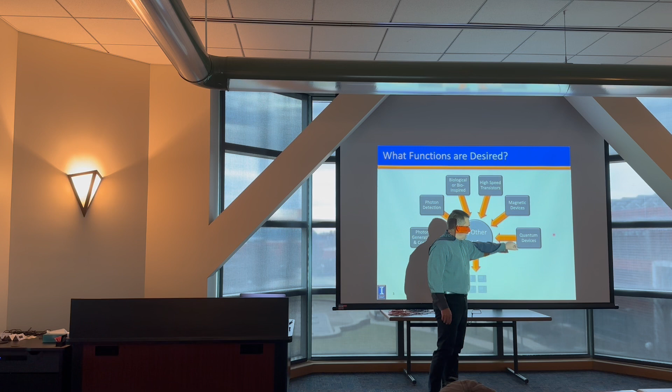Okay? So we'd like to be able to take the sorts of large-scale integrated devices you can make on silicon, and add other things to those. We'd like, for example, to be able to do photon generation and control. We want to be able to detect photons, so we can basically augment silicon by adding photonic functionality. People are talking about quantum devices - can we enhance silicon by bringing various devices that are being used in quantum information, quantum communications onto that platform as well.

If we start talking about things like AI systems and other sorts of things, are there other kinds of devices - for example, magnetic devices or other sorts of non-silicon devices that can be used for those sorts of things. Of course, beyond just conventional electronics, there's an interest in pushing the speed higher. So does it make sense to augment silicon with materials that can run at higher speed?

So you basically have CMOS processors, and maybe at the edge of those devices you have things like high-speed electrical multiplexers and demultiplexers implemented in other materials that enable you to push a bit faster, turn up to 11. And then bio-inspired materials - people are looking at biological systems. Is there something in the future that involves augmenting silicon by having something of a biological nature?

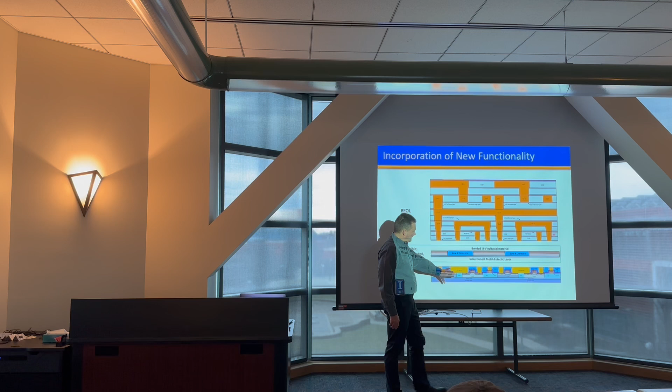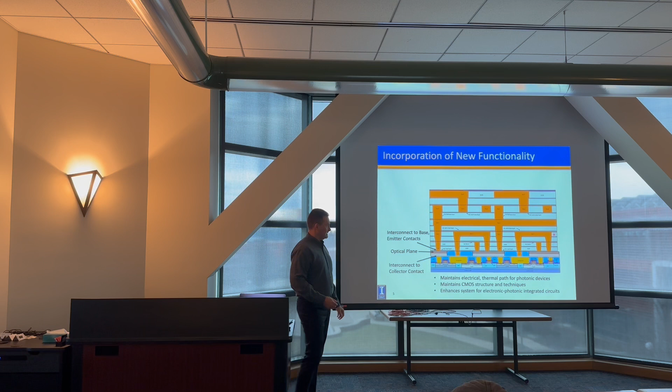When we think about incorporating functionality of some kind, what would be ideal is if that were an actual layer in the CMOS stack. So we start by taking our wafer coming out of the front end of line process. We incorporate one or multiple layers that have some additional functionality, 3-5 materials, etc. Then we build the rest of the stack on top of that, putting in all our interconnect layers, so that this becomes an augmented integrated circuit with enhanced functionality embedded in it. This is where we'd like to be able to go eventually.

Stepping back again, from a silicon perspective, what does it do well? What does it do poorly? From the standpoint of things it does right, you can't argue with the manufacturing infrastructure. It costs $20 billion to build a fab. There's fabs all over the world. You're not going to replace that infrastructure with something else, and it's a well-oiled machine, so to speak.

Silicon is robust. If you work with silicon versus 3-5 materials - how many of you handle 3-5s regularly? Probably a handful of you. If I have a silicon wafer, holding it with tweezers, and I drop it from here, it's probably going to bounce. Maybe it'll break, but it'll probably bounce. If I do the same thing with gallium arsenide, it's going to break. If I do the same thing with indium phosphide, it's going to break even worse. The fragility of compound semiconductors is difficult to deal with when you talk about scaling up your processes.

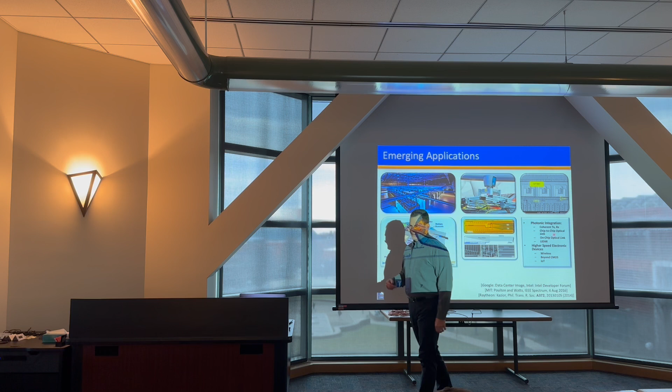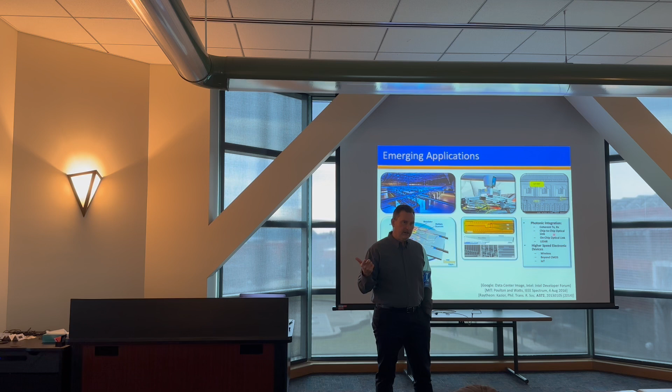For automotive applications, people have been talking about LiDAR for self-driving cars, and general automotive applications too. A number of people have also been looking at ways of augmenting the speed of silicon by having CMOS combined with something like a high-speed indium phosphide HBT integrated with that, to allow you to do things beyond the conventional limits of silicon—like 5G, 6G. So there are a lot of these emerging applications, largely driven either by the desire to do things of a photonic nature, or to have speed you can't get with silicon devices alone.

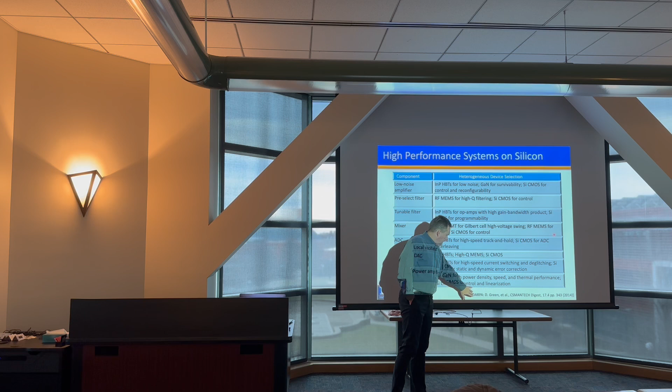A handful of years back, DARPA had a program trying to really push heterogeneous integration forward. It started as DAHI and had a variety of names. Dan Green was the guy at DARPA pushing that at the time, and he was basically saying: here's a number of things we might be able to do if we had the capability of putting other sorts of materials onto silicon.

He was focused mostly on electronic applications—saying if I want to do a low noise amplifier, ideally I'd like either indium phosphide HBTs or gallium nitride, but I'd like to do all of my control and reconfigurability in silicon CMOS. Or for filtering, it'd be great to have RF MEMS with silicon CMOS, or tunable filters using indium phosphide HBTs with silicon CMOS. So the theme is adding a unique functionality that the III-Vs do well, augmented with the power of CMOS for programmability and control.

So that's electronic. From a photonic perspective, there's tremendous interest in increasing the data rate, both for long haul links and within data centers. What's the limit? It's interesting—I remember people arguing maybe a couple decades ago, why do I need 10 gigabits over my fiber? With 10 gigabits per second you can pass the entire Library of Congress in whatever amount of time, and those arguments were taking place.

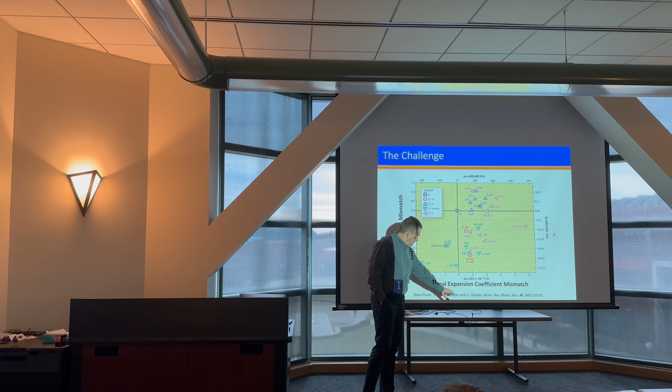Quite often what you'll see is something that shows lattice constant versus band gap. Well, that's important if I'm designing a device, right? If I want to make a heterostructure device, I need to stay with the same lattice constant, and I want to build up a structure.

But this more importantly shows what I can realize without messing my material up. And the two most important things are: how much deviation does my lattice constant have from the material I'm trying to put it on, and secondly, what is the thermal expansion difference?

If I have two materials that are perfectly lattice matched, but they have a huge difference in thermal expansion coefficient, I'm going to have a reliability problem. So this encapsulates both thermal expansion mismatch problems as well as lattice mismatch problems.

And if I look at silicon sitting here by itself, that really shows you what the problem is. The problem with putting materials on silicon is that its lattice constant and thermal expansion coefficient are both really not well suited to other materials.

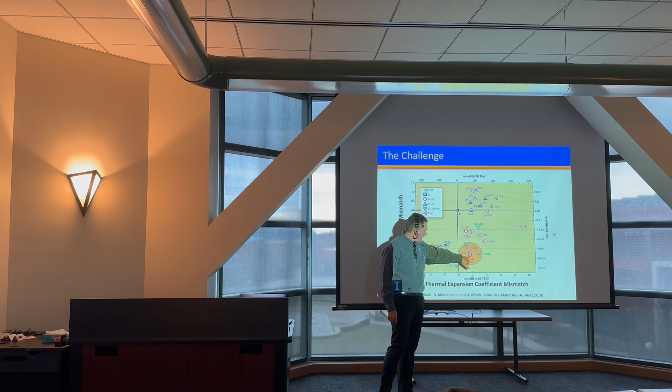Down here we've got silicon carbide, and fairly close to silicon carbide we've got our gallium nitride, aluminum gallium nitride, some other materials, that's proven to be interesting. Silicon, of course, is way over here. There's some other materials that have come in: indium phosphide, indium arsenide, aluminum gallium arsenide, gallium arsenide. All those things are in parts of this where we have good match between lattice constant and thermal expansion coefficient.

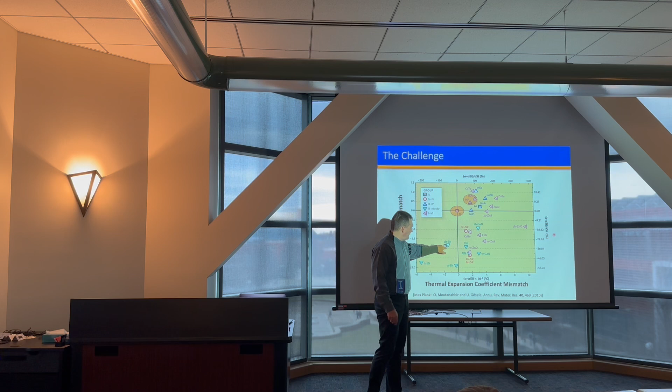It's sort of interesting over here, people have been playing around with this system, boron nitride on diamond. I don't know if anything will come of that at all, but it is one that's sort of interesting from the standpoint of this metric.

Now, people have recognized almost from the early days of compound semiconductors that it would be really nice if we could stick them on silicon.

If we go back to the 1980s, to when a lot of the growth technologies we use today, MOCVD, MBE, were really being worked on aggressively, people tried doing direct growth of 3-5 materials on silicon. Back when I was in Nick Holonyak's lab, we had people working on gallium arsenide based lasers on silicon. You could make a gallium arsenide based laser on silicon, but the problem was it lasted for about 30 seconds.

The reason it lasted for 30 seconds or less was because of the issue with defects. In order to make a lattice mismatched material, I'm going to have to put a big buffer on there to try to get rid of the defects I'm producing as a consequence of lattice mismatched growth. Even if I do tricks, like having superlattices or varying temperature during growth to try to bend my dislocations over, I still have this huge dislocation network sitting below my device. Eventually, when that dislocation grows due to heat and light driving the defect into my active region, it's going to explode and my device is going to die relatively rapidly.

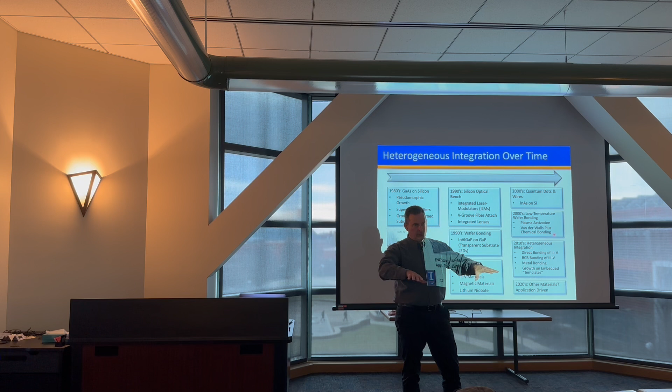And that became an important technology. Smart cut became an important technology too. People wanted to have SOI wafers, silicon on insulator, for making higher speed electronic devices, and it was discovered that you could use a technique called ion slicing. I basically implant a wafer with a very specific energy that creates a peak of a material, let's say helium or hydrogen. If I heat that up, I form little micro bubbles, basically creating a micro cleave, and I'm able, if I bond that onto another wafer, to create an SOI wafer using this ion slicing technique.

That's been used for a number of different things. People have demonstrated it for 3-5 materials, magnetic materials, lithium niobate - but it's mostly used these days for silicon on insulator. If we progress more now into the 2000s, a number of interesting developments occurred. People started doing quantum dot devices. Now, quantum dots are sort of interesting.

One of the groups working on lasers on silicon was doing indium arsenide dots on silicon. The nice thing about a dot is that if your defect crawls up into the active region, you kill a more limited portion of your active region. You might wipe out one of your dots, but your defects don't grow the same way, so you can get better reliability on quantum dot lasers on silicon than on quantum well lasers on silicon, but they're still not perfect.

Low temperature wafer bonding started coming in. People were using things like plasma activation of surfaces followed by wafer bonding, which works well with oxide surfaces, and other techniques like van der Waals plus chemical bonding, to basically allow bonding to occur at lower temperatures than could previously be done.

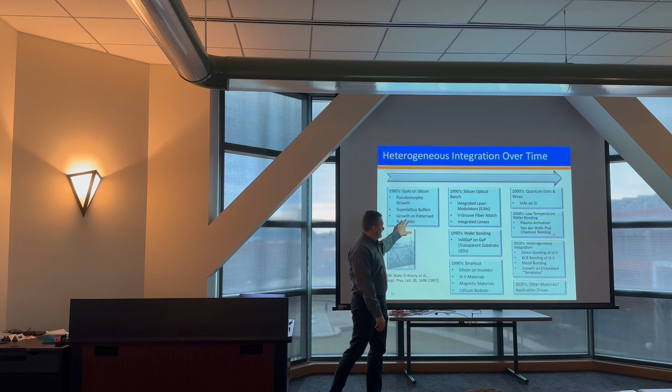Getting a little later, people were doing things like direct bonding of 3-5 materials onto silicon to make heterogeneous lasers: BCB bonding, metal bonding, growth on embedded templates, things like that. There's been a progression, and people today talk a lot about heterogeneous integration because this progression has allowed problems to be solved and methods developed that enable these applications to work with devices that are potentially more reliable. There's still more work that has to be done. So what I'm going to do now is walk through a couple things that have happened over time.

In more recent years, in silicon technology, to push things to higher speed, people have been working with growth of indium gallium arsenide devices on silicon using thick buffers. These are more for electronic applications.

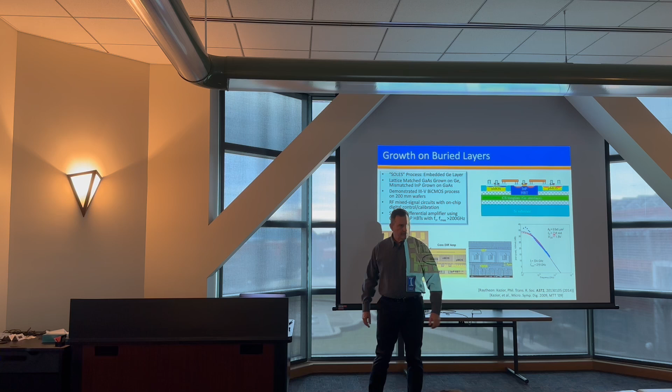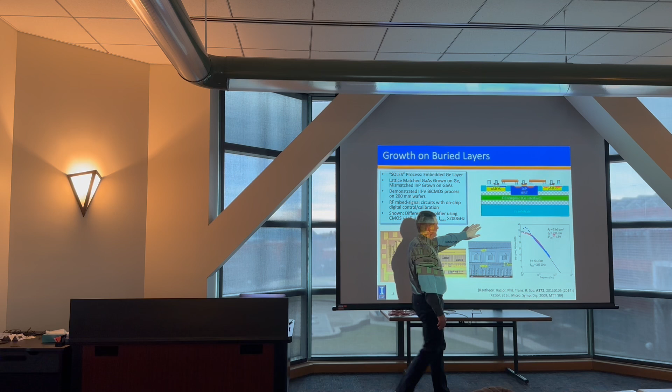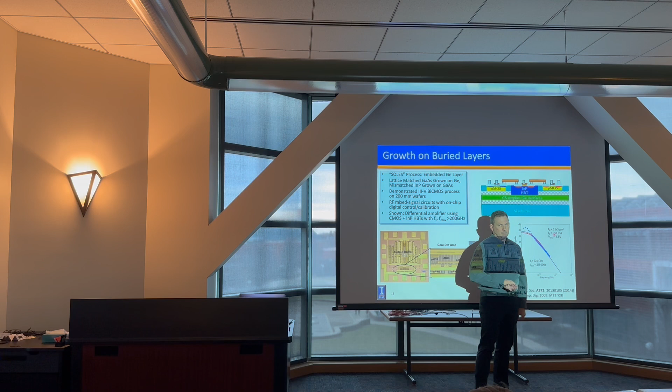There's been work using growth on buried layers. An example: you have a silicon substrate, and something they call the compound semiconductor template, which in this case is germanium. We know how to grow gallium arsenide on germanium, and we know how to grow indium phosphide on gallium arsenide. There are defects involved, but you can do a multi-step growth process to get that.

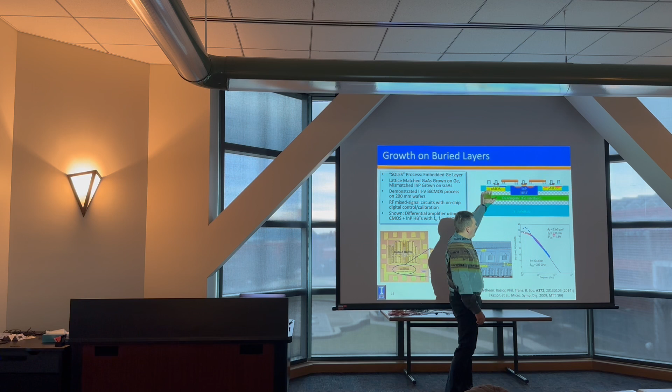This also shows another interesting thing: with this silicon substrate, which might not be a device quality substrate, you can wafer bond something like a higher quality CMOS layer on top of that, and utilize that to make your CMOS devices, and then you've got your 3-5 device that you've grown on this template layer.

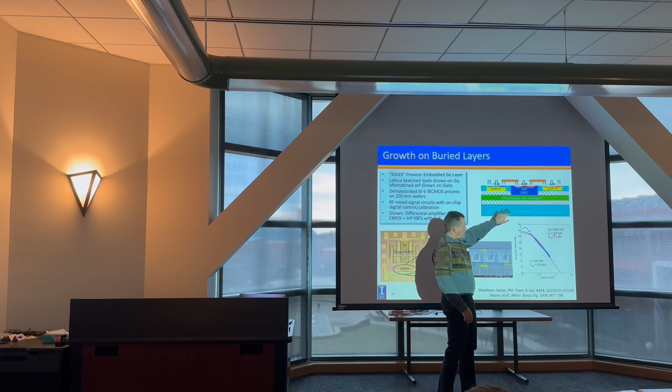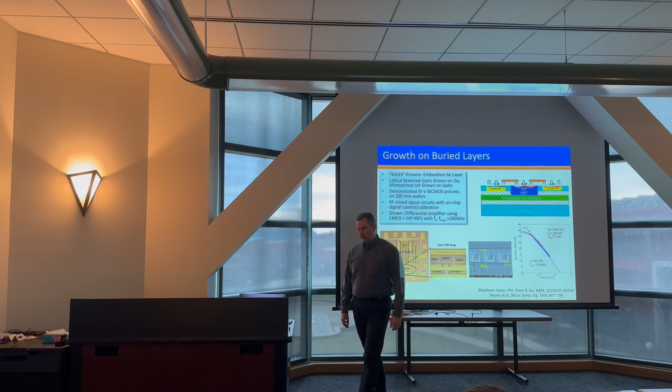People have demonstrated pretty interesting electronic results with this. In this particular instance, they were growing indium phosphide HBTs that had an F max greater than 200 gigahertz, and integrating that with CMOS circuitry.

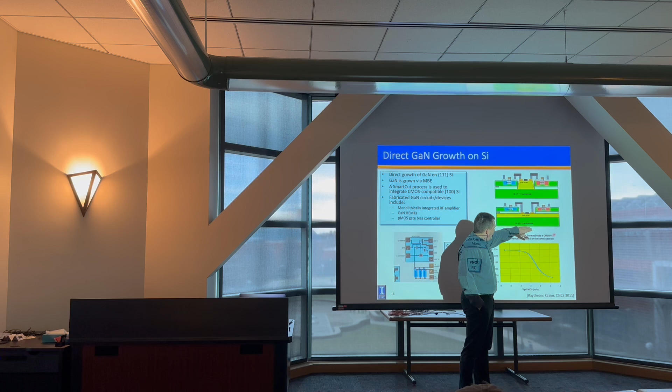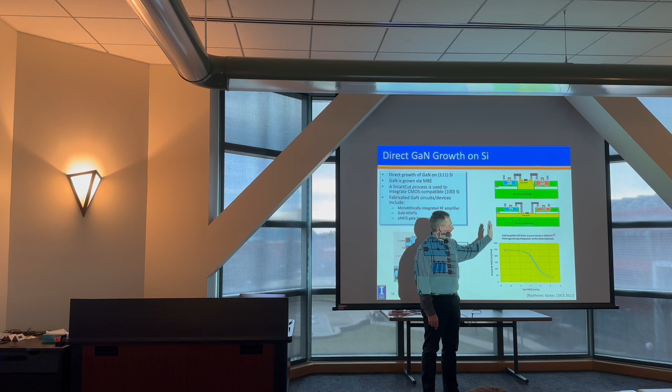Same is true of gallium nitride. This is interesting work: here they grew gallium nitride on 111 silicon, which people can do at wafer scale. Then they put an oxide layer on, wafer bonded a 100 silicon layer, and using ion slicing, similar to the technique used for making SOI, they produced a thin layer of that and made their CMOS circuitry on it. So they were able to integrate gallium nitride-based devices with silicon CMOS devices.

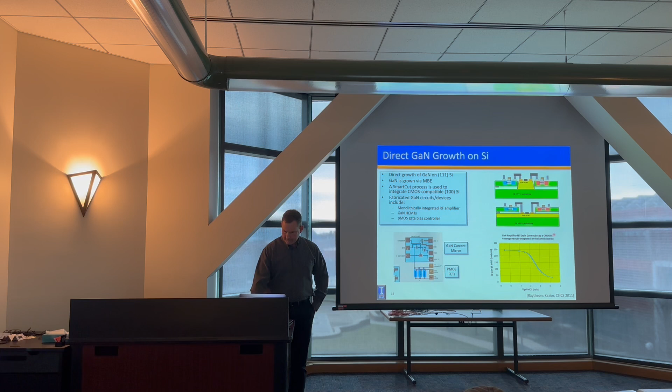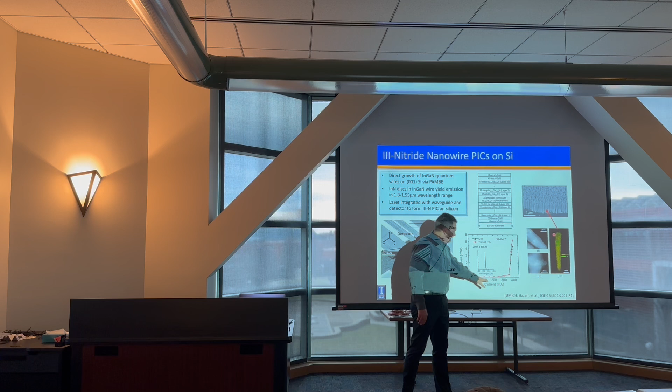This is some other interesting work that came out of the University of Michigan. Here they were growing nanowires of gallium nitride, basically 3 nitride devices on silicon, and making lasers, detectors, and waveguides using this nanowire material. These devices weren't great - the threshold currents were high and there were various problems with them, but it showed promise as a technique for integrating those materials onto silicon, again in a wafer scale process.

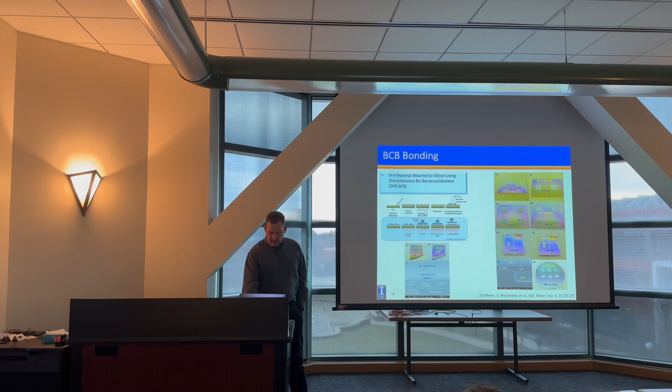With regard to bonding approaches for heterogeneous integration, you've seen a number of groups doing things involving BCB bonding. BCB is basically a polymeric type material. This has the advantage of being scalable, but has the disadvantage of not giving you a really great thermal environment for your device, because BCB does not have great thermal conductivity.

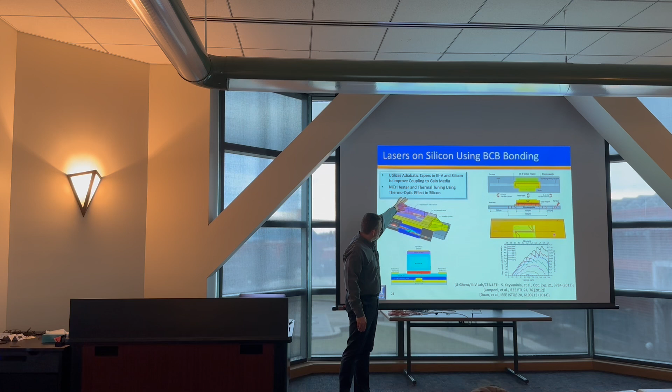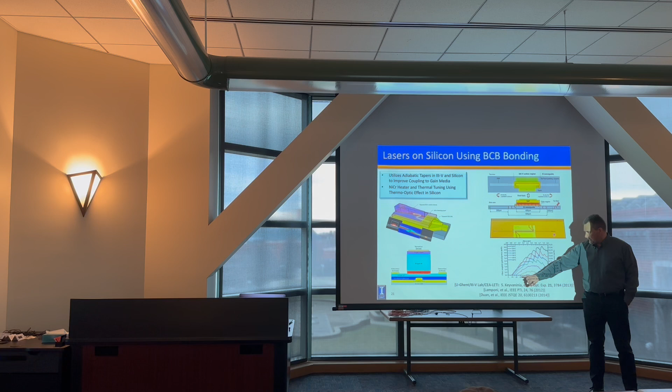The folks at Ghent made 3-5 lasers on silicon using BCB bonding. They took a 3-5 layer, patterned and etched it such that there was a taper. In the gain region, you'd have propagation of your 3-5 material; at the edges, they would couple into a silicon waveguide. They were able to make lasers on silicon using this approach, but again the lasers were not great - higher thresholds and not really good thermal performance, partly because of the thermal environment created by that BCB.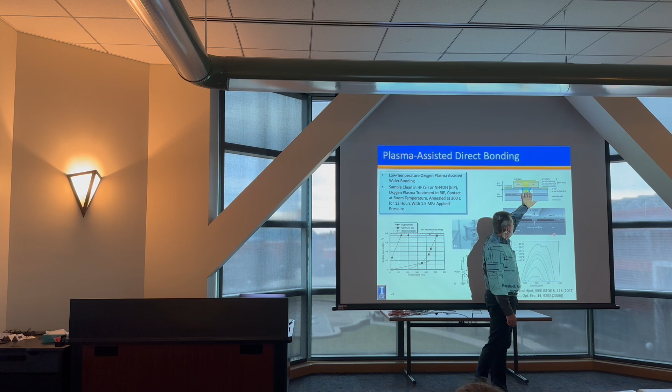Plasma-assisted wafer bonding has also been used—this is what Bowers did. This figure has probably shown up in a million publications. Basically, they took a gain region, a 3-5 gain region, and using plasma-activated low temperature bonding, bonded it to a silicon waveguide such that the mode was mostly present in the silicon waveguide, but had enough overlap with the gain region to allow the device to lase, and they were able to make lasers using this technique.

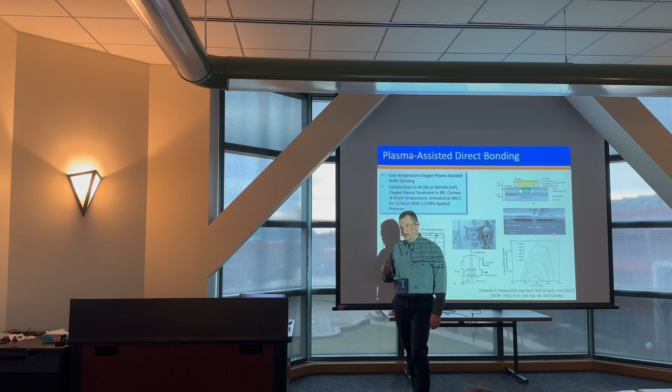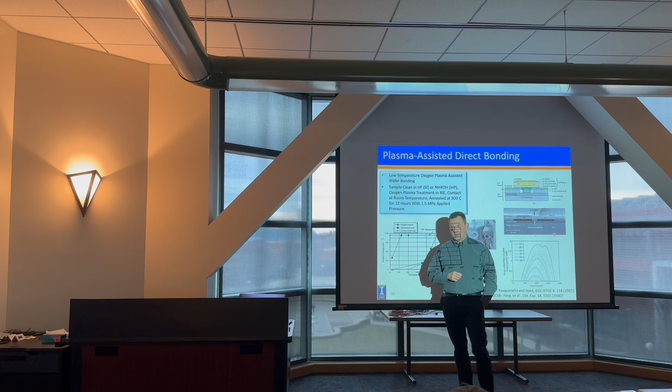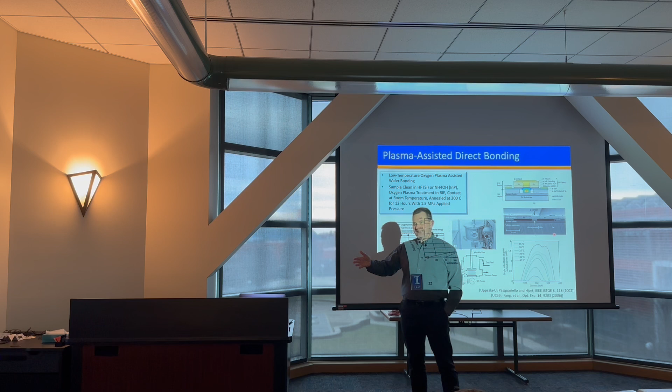But there are some limitations to that. The first is that the threshold currents aren't low. If you think about it, I have a lossy interface in my laser cavity, because if I'm doing low temperature wafer bonding, I'm going to have a defected interface. That defected interface gives me mid-gap states, which absorb my light. So inside my laser cavity, I have an absorber, and that's undesirable.

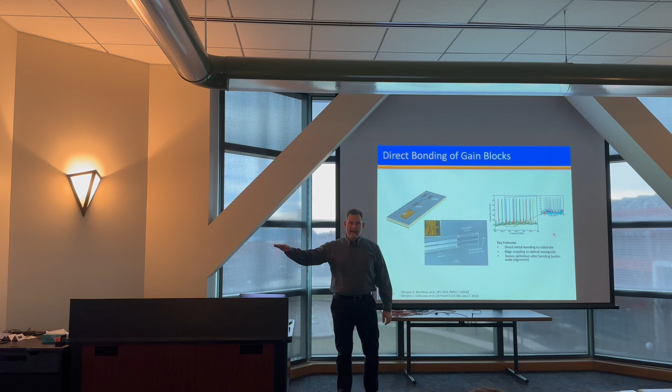But it represents an interesting approach. Prior to coming to Illinois, I was involved with a group doing direct bonding of 3-5 material to silicon, creating bridge waveguides between the gain media and the silicon waveguides, so that you could make tunable lasers using an integrated gain material, where instead of coupling across an interface, it's edge coupling. There's still a little optical loss here and there associated with bridging between the 3-5 and the silicon, but it doesn't go the entire length of the device, so the loss is lower.

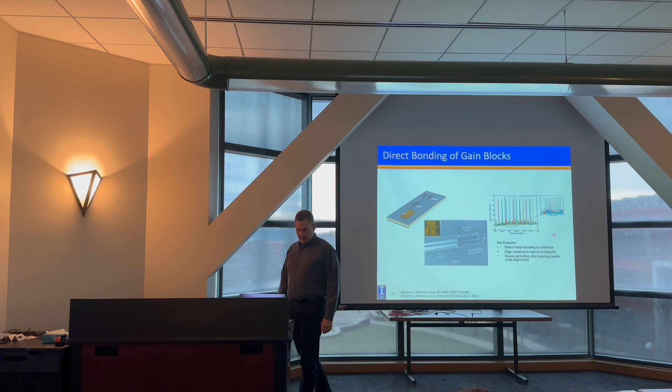And that was the basis for a company that's still out there making silicon photonic devices.

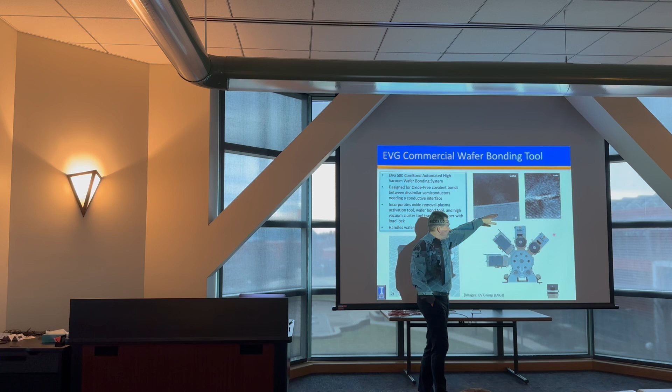And of course, with wafer bonding in general, very large scale systems are available for doing that. This is an example of an EVG cluster tool used for commercial wafer bonding. We actually tried to get one of these at Illinois—the problem is it costs about $10 million when all is said and done. But the key thing with these tools is that by combining oxide removal using a plasma process and then bonding at a slightly higher temperature, you're able to produce pretty good interfaces between a 3-5 material and other materials like silicon.

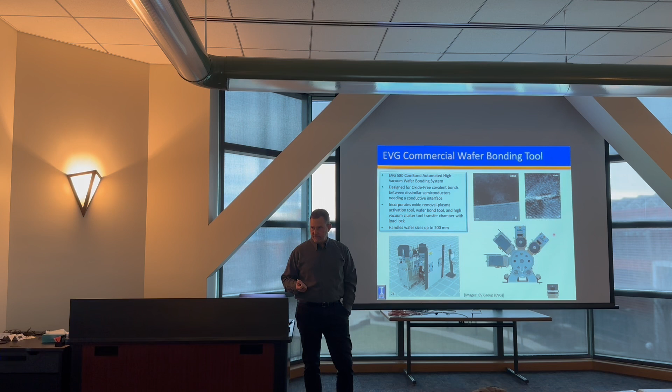This is gallium arsenide phosphide, and people have also done it for silicon and other materials. But it's still not a perfect interface—it has slightly different optical loss characteristics and also electrical characteristics that may not be perfect. In fact, when people do this process, a lot of what they work on in optimizing their parameters is trying to improve both the electrical and optical properties of the interface.

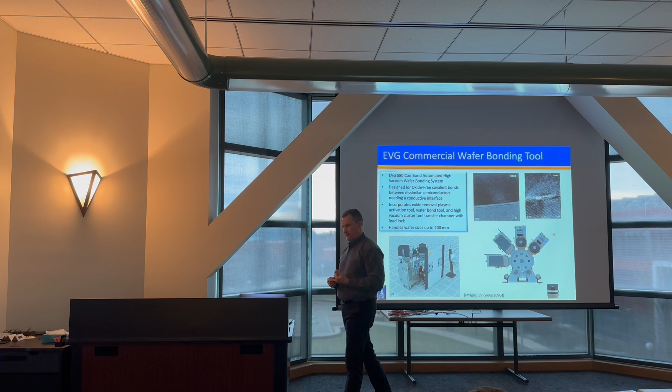There are some other interesting tools out there that might become useful for heterogeneous integration. One of those is metal film bonding. With certain materials, if I have a flat enough surface and bring my metals together—for example, gold with gold—and that material is flat enough, I can basically create a bond by just pushing my materials together. With other materials, I might need to do this in a vacuum environment, or somewhere I can remove the metal oxide layer.

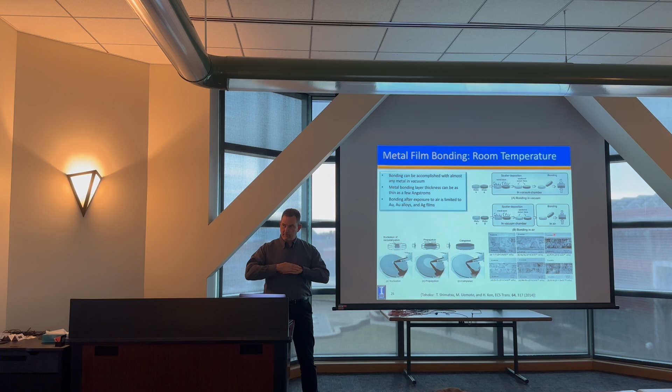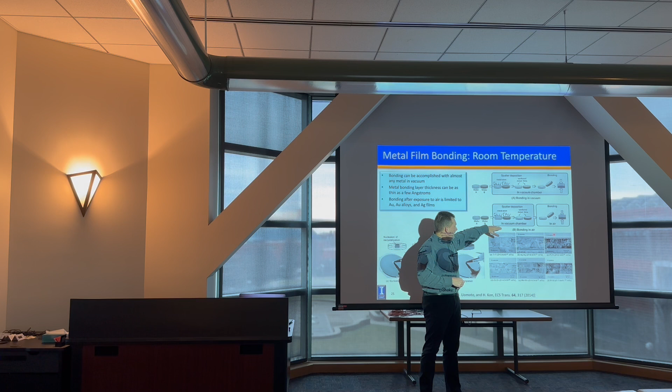Systems that people have demonstrated this with include titanium, silver, platinum, chrome, moly, tungsten—all of these have been used to form these metal bonds, which are high quality, but they have limitations regarding the apparatus needed, because you need to be able to do it in vacuum, clean your surface, flip, align, and bond. So doing something like this requires the same sort of cluster tool we saw in the previous slide.

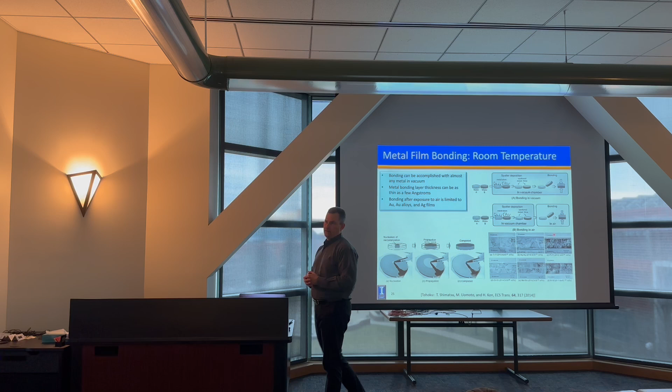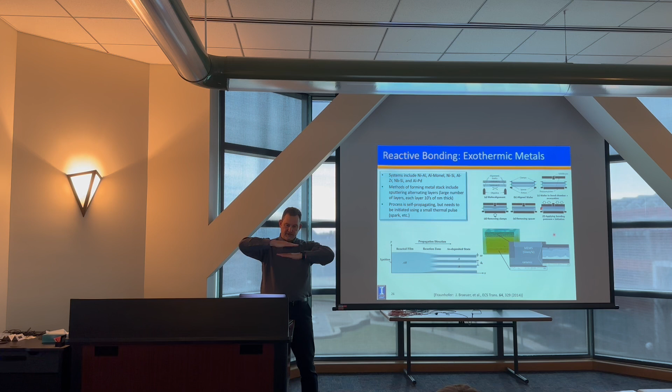Another interesting thing people have done is use exothermic processes, with certain materials like nickel aluminum, aluminum monel, nickel silicon, or aluminum zirconium. If I create a super lattice of that material on two different wafers and bring them together and nucleate a reaction, I'll create a bond, because it's an exothermic reaction that will propagate once it starts. But first I need to nucleate it, typically with something like a spark, a thermal event, or a laser pulse to get the process started.

But as with anything else, whenever you have a reaction like that occurring, you're not perfectly in control of what happens on both sides. You have to worry about what this exothermic process is going to do to the layers above and below as a consequence.

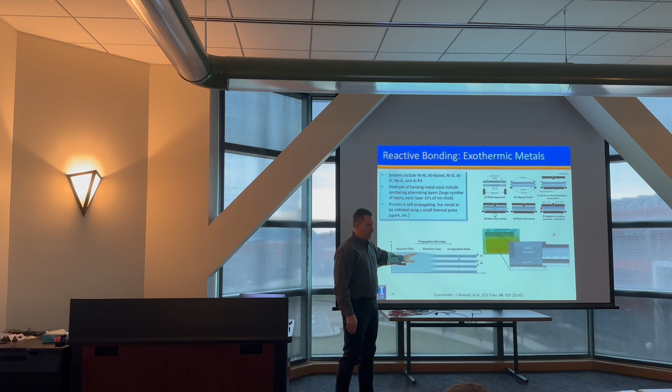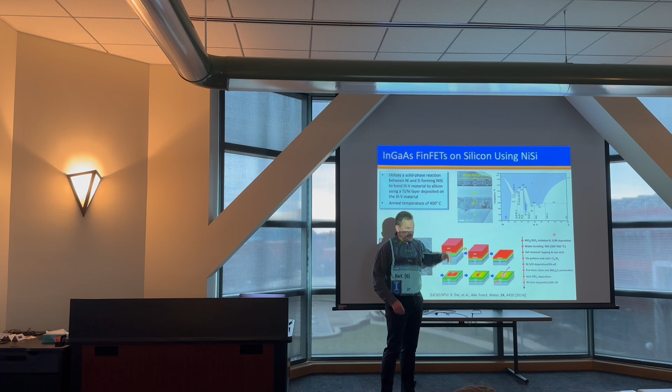Some people have used nickel silicon, which does have this exothermic process. If you put a nickel layer on an indium phosphide InGaAs structure and form that nickel silicon bond, which occurs at temperatures around 400 degrees C, you can use that to create indium phosphide fins on silicon, which has been used to make InGaAs FinFETs.

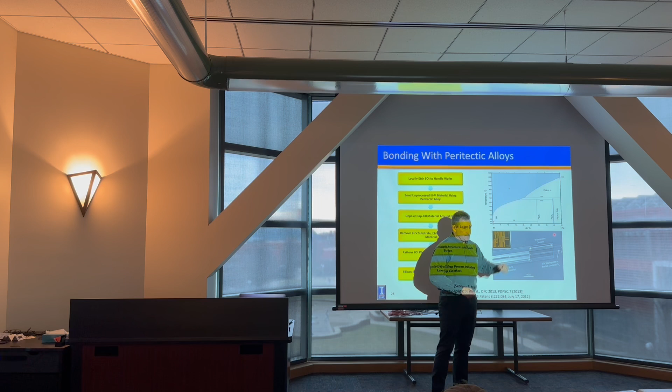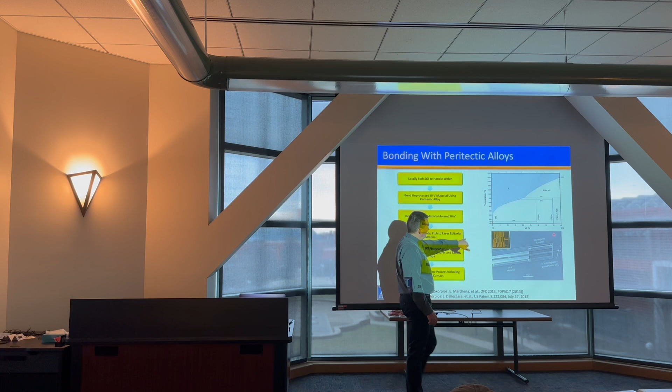There's another interesting type of system people have used: bonding using a peritectic alloy. For example, indium palladium is one system with the capability of melting at a low temperature. If I have liquid indium in contact with a palladium layer, a reaction occurs forming palladium-3, indium-7, which, as opposed to having a melting temperature at the temperature of indium, has a melting temperature close to 600 to almost 700 degrees.

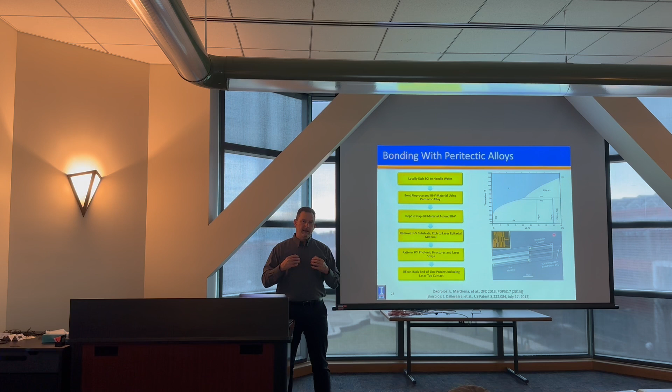So basically I can bond at a low temperature if my layers are thin enough, and if I fully consume my indium and palladium, that bond will be stable up to almost 700 degrees.

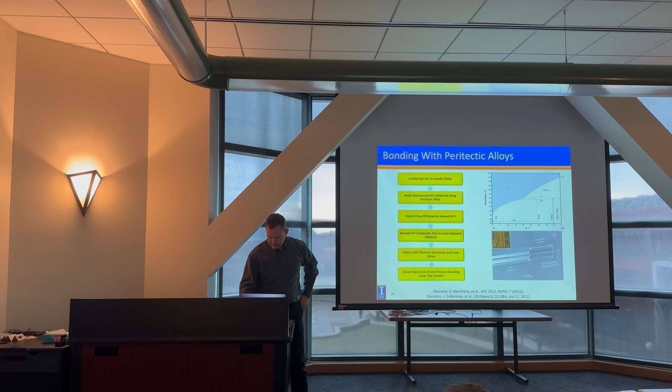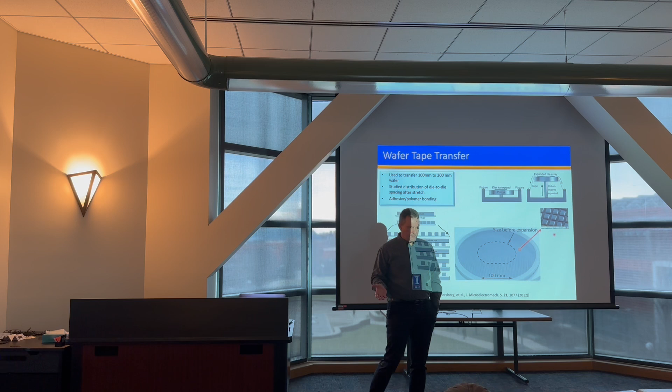Another thing people have done is chiplet transfer. One of the criticisms of 3-5 bonding onto silicon was wafer size mismatch. Most of my 3-5 wafers might be a 6-inch gallium arsenide wafer, though there are some 8-inch wafers available now. If I've got a 300 millimeter silicon wafer and a 6-inch gallium arsenide wafer, how do I distribute that gallium arsenide onto my silicon?

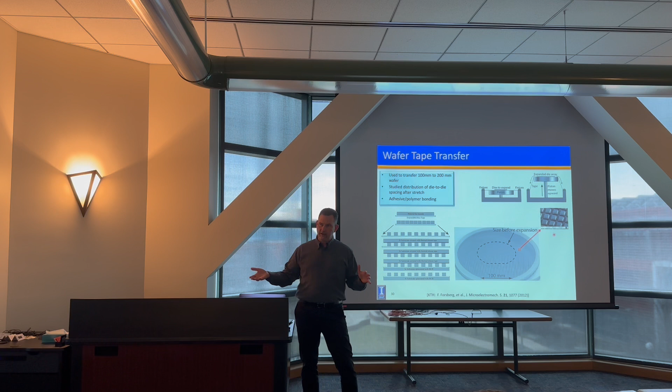Well, one thing people have done is dice the wafer up, put it on something like a wafer tape, stretch it out, and bond one onto the other. This is not a perfect solution. People have also done things like smart cut with 3-5s as well.

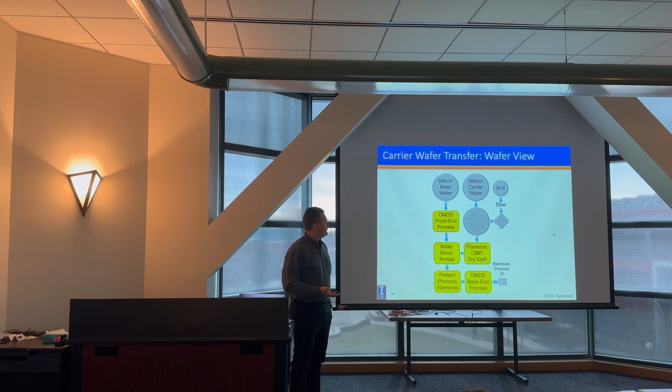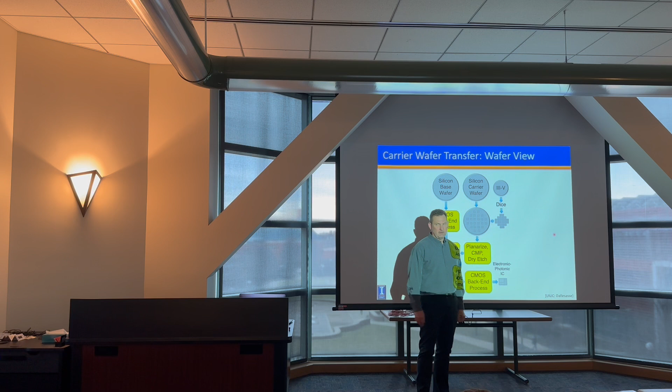We're running out of time, but I want to talk about one thing we're doing at Illinois which solves the wafer size mismatch problem without the variability of using wafer tape to stretch your wafer. In this method, we imagine a silicon wafer going through the front end of line process of our silicon fab, a second silicon carrier wafer, and our 3-5 wafer. We take that silicon carrier wafer, and after dicing our 3-5 material, mount it epi side down on our silicon carrier wafer. We then remove our substrate, do photolithography to precisely define where those 3-5 islands are, and do a single wafer bonding process to bring these two together.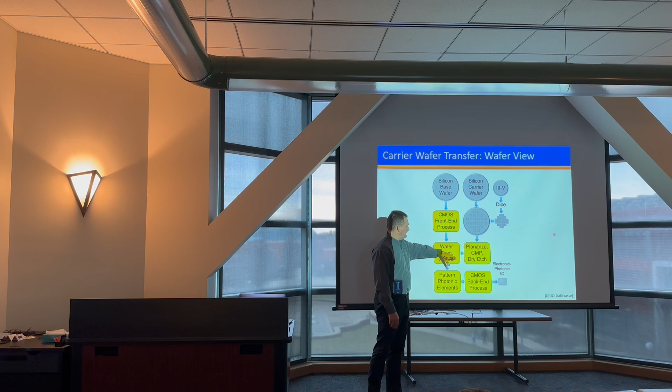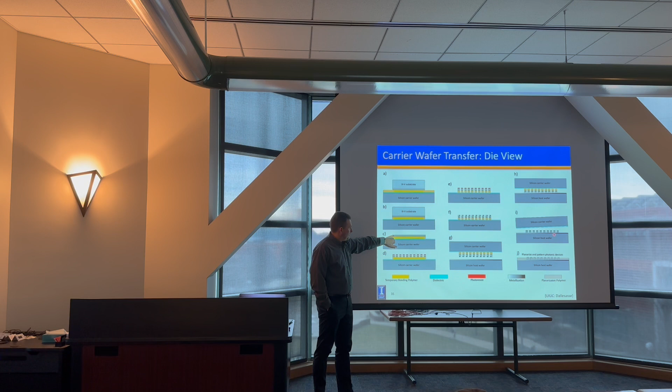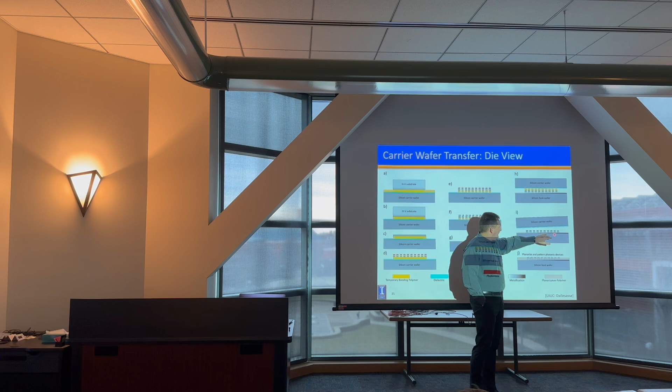If we imagine what that looks like on a cross-sectional basis: we have our silicon carrier wafer, with our 3-5 epi side down. We remove the substrate, then do dry etching to precisely pattern where the 3-5 material is located. We deposit a bonding material onto that—this is a temporary bond. We carry that through and flip it over. On our silicon host wafer, we have receptor sites metallized using a different metal. We then do a permanent bond between those, release our temporary bond, and end up with 3-5 islands precisely located on our silicon host wafer using this epitaxial transfer process. Now there are some particulars to that.

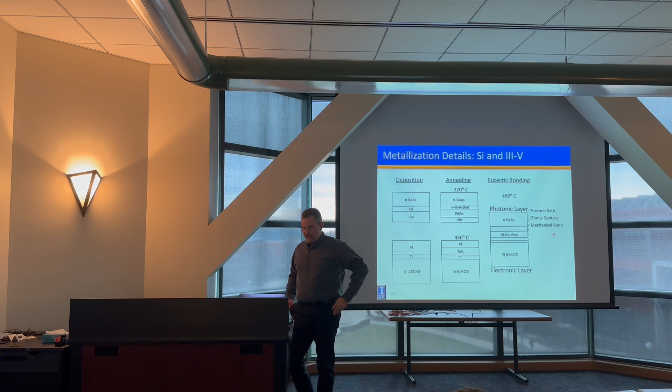The first question is what sort of metal scheme you use. As it ends up, aluminum and germanium have a very nice eutectic temperature, so I can form a permanent bond using aluminum germanium, and also beneficially that acts as an ohmic contact to my gallium arsenide.

This is showing, we're doing this on slightly smaller wafers here, but you can use things like a 3D printed template to coarsely place your pieces. The reason we're doing this is to eliminate the need to have every single photonic device be precisely placed with micron scale precision on the wafer. By using a carrier wafer like this, we can coarsely place all of our 3-5s and then photolithographically define where it is on our carrier wafer.

So instead of doing a million alignments for every photonic device we have on that 300 millimeter wafer, we do one alignment process. And we've done that with laser material.

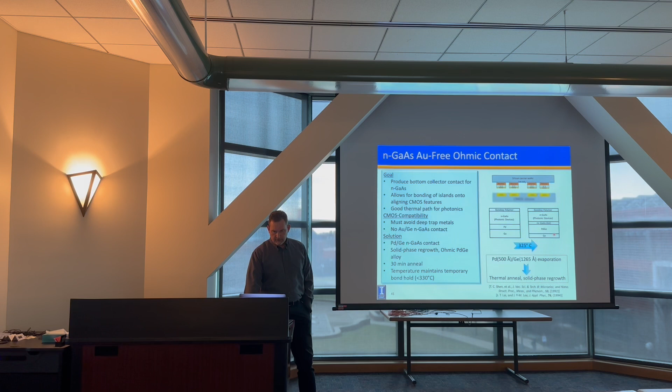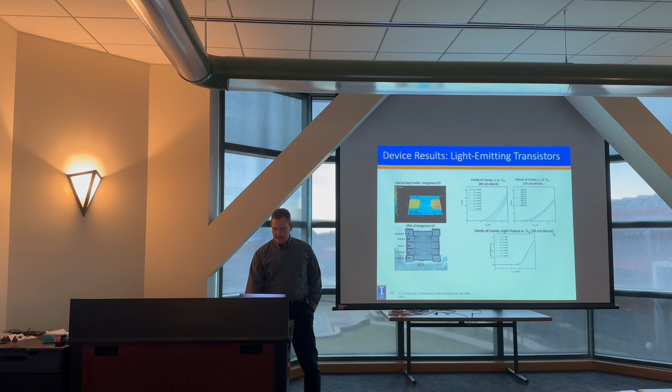This is walking through some process steps, showing what our chiplets look like. We've used this to fabricate both light-emitting transistors after the transfer process, and also, more interestingly, VCSELs. In this work, the VCSELs were formed on the host wafer after the transfer process.

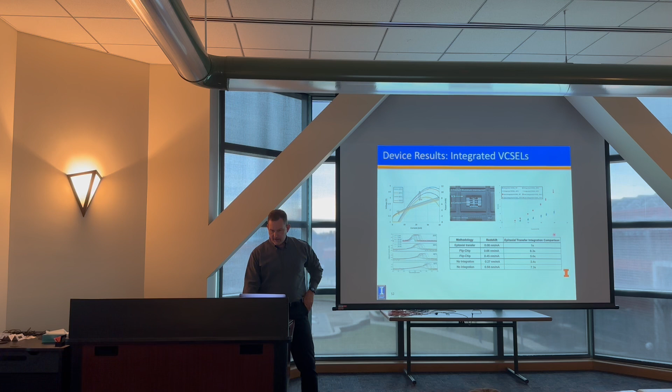So now all of our apertures can be defined relative to features existing on that silicon host wafer with photolithographic precision. All the processing is done afterwards. Okay, and I know we're running out of time, so I'll mention just a couple things in these slides.

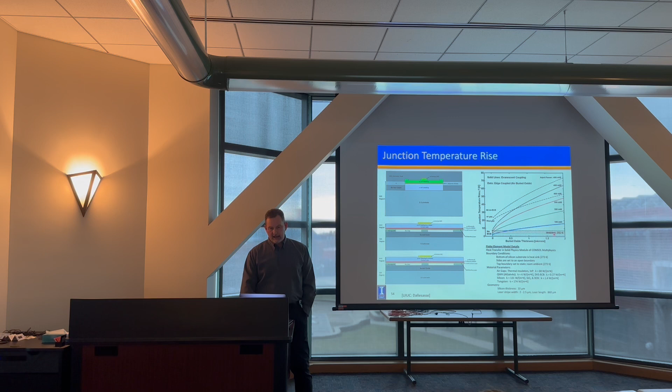The first one is the thermal problem associated with oxide layers. This is reinforcing a point I was making earlier with regard to the problems with either BCB bonded devices or the heterogeneous devices that were bonded in the UCSB approach. If you're not directly on your silicon substrate, you can see significant temperature rise in your devices.

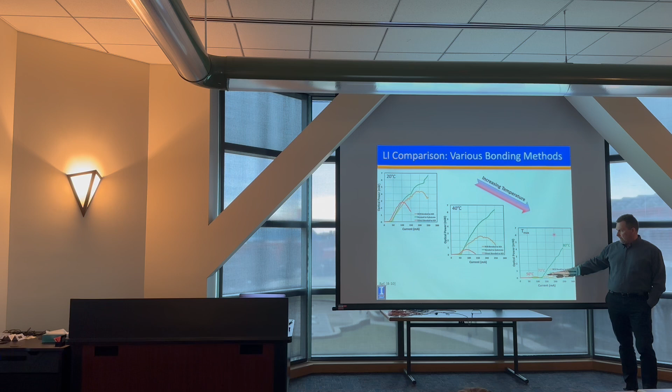And if you look at things like your L-I characteristics for the various approaches people have used, you see over temperature the impact that either the BCB bonding or the direct bonding onto something that still has a box layer has on the device. It basically loses its performance at an elevated temperature.

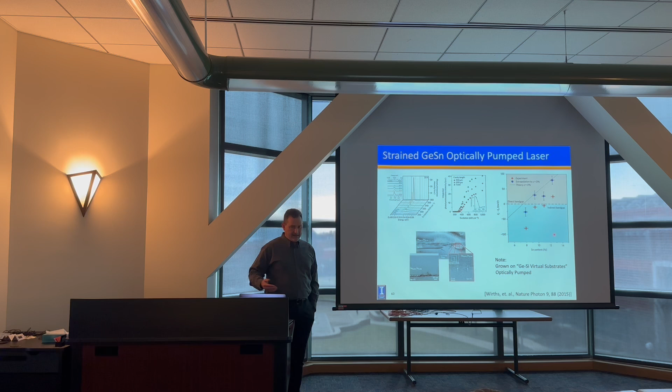I'd be remiss if I didn't mention a couple things that everyone was talking about 10 years ago and nobody's talking about today because nothing happened. The first one is strained germanium tin lasers — basically putting lasers on silicon using strained materials, strained germanium. Everyone was saying this is going to revolutionize the world, and of course it didn't.

Interesting work, interesting results, to keep in mind in the background with regard to things that can be done. The reason this works is because the direct and indirect valleys in germanium are pretty close to each other, and if I strain them, I can push it over such that it acts direct, but I still have an indirect valley sitting really close.

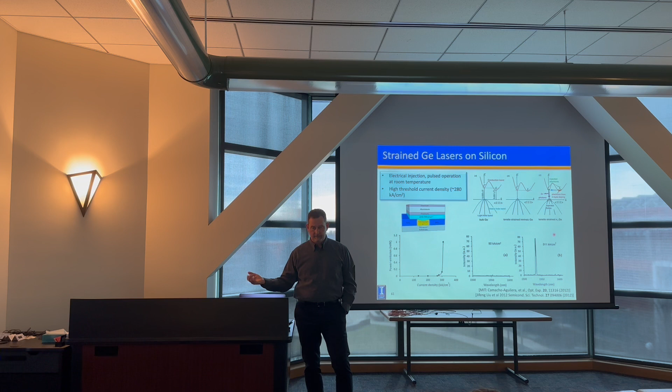Again, in silicon photonics, we've got a number of devices. I'm going to skip over all this — it's just in there in case people were interested.

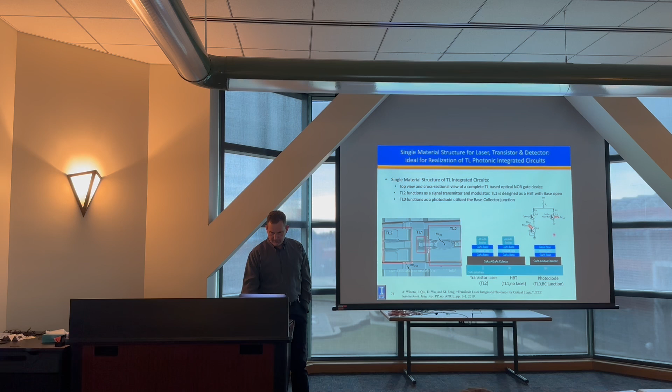Where we're going as we push forward is integration with wider bandgap materials. Nitride photonics might be something interesting that develops because it allows us to do shorter wavelength lasers than we can currently do using materials like silicon, because with nitrides we're in a portion of the spectrum that's transmissive. That might be important for things like quantum applications.

So just to wrap up, obviously heterogeneous integration, as I said before, is an overnight success — 20 years in the making. Today it's being driven by real demands, the real need for things to enhance the performance of our silicon.

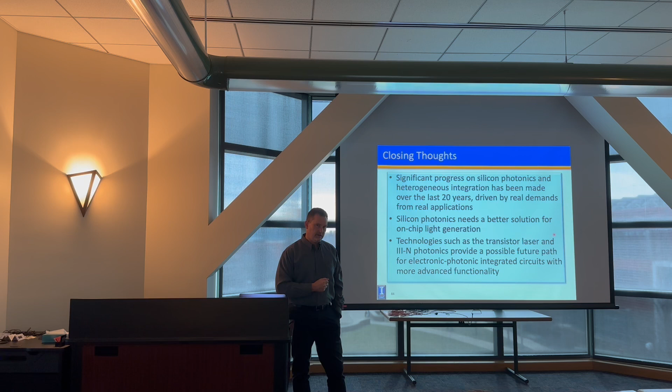Looking forward, I think we're going to continue to see more use of III-V materials, integration of III-V materials onto a silicon platform in order to achieve some of these application needs that we see. So with that, thanks very much, and happy to take questions.